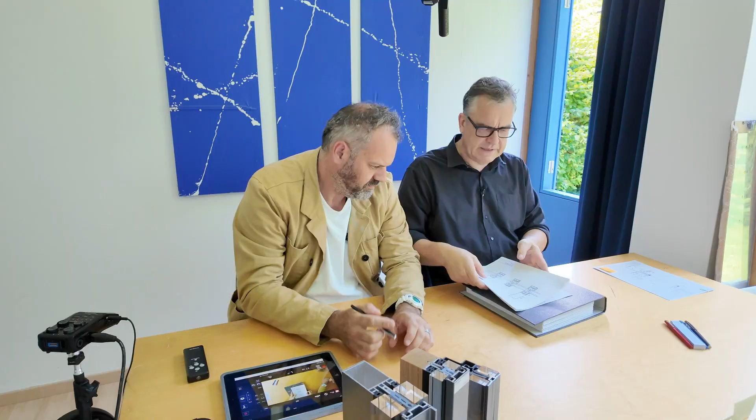So we did the tender process. We made the tender document. We did all this discussion. We had the bidding process. We evaluated qualities, time, performance of the system, budget, and now we have a contract. So there's a new partner in the game who's now really going to build what we wanted.

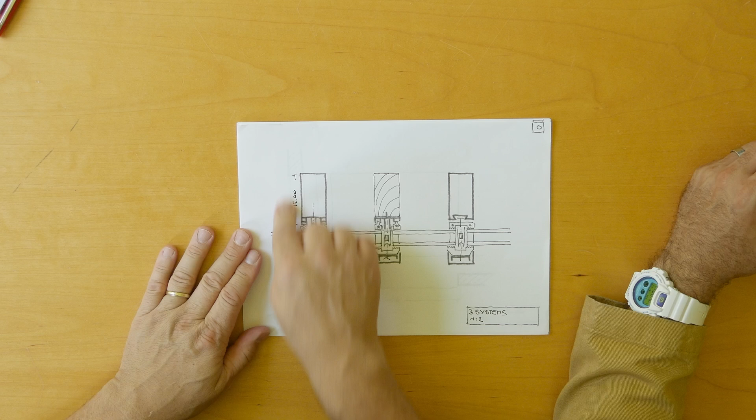So we have tender documents aside, we have all these nice drawings. As we discussed with the tender document, we decreased the amount of information here. So we do actually know a lot more, but now the contractor came with a certain system and he knows more about this system than we know, at least he should. And then he's going to redo this because he's not having this as a document for really manufacturing his facade.

He needs a new setup, which is called shop drawings. And these are shop drawings. It's actually shop drawings you did.

When I look at them, just to explain - because I not only teach, but we also at the office do facade engineering, and we also did the shop drawings for the contractors, the facade contractors.

So actually, first we worked as facade consultants, where we try to leave as many things open as possible, and we make vague or less informative drawings in there - general system work. That's when we work for the architect, and now I switch paths. Different project, different companies.

So therefore, now I'm working the shop drawings for a facade contractor. So therefore, I am actually drawing in high detail the facade, how it's actually going to be built and fabricated.

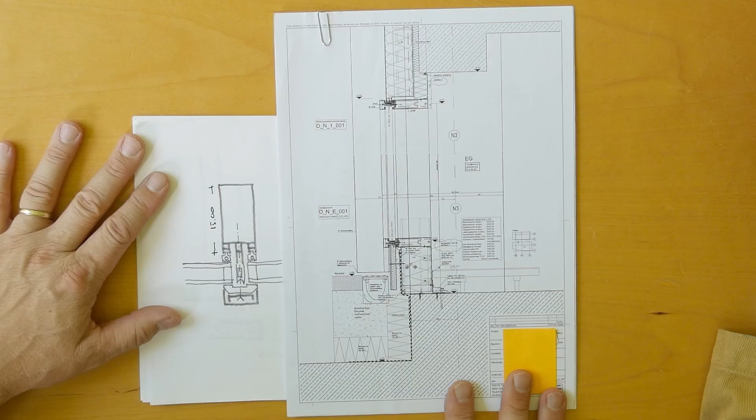So when we look at this, we're going to do a close-up in a minute. This is a lot more information. When I exactly look at this, it says the exact precise dimensions of the IGUs. We have the IGU in here, so we know exactly from the building physics and everything like that. We already had everything inside there, and we make sure that the glass - all information is known.

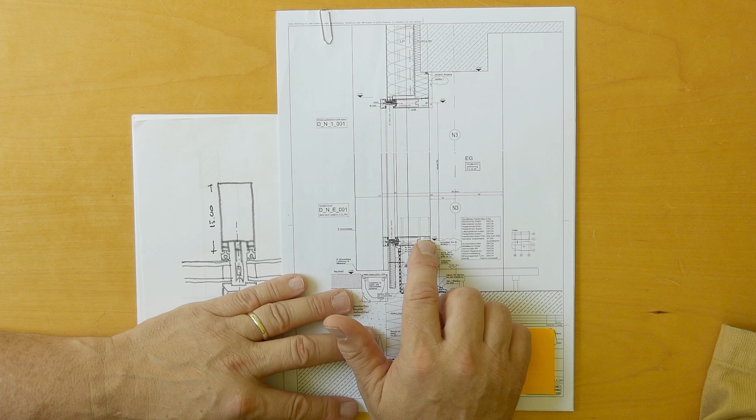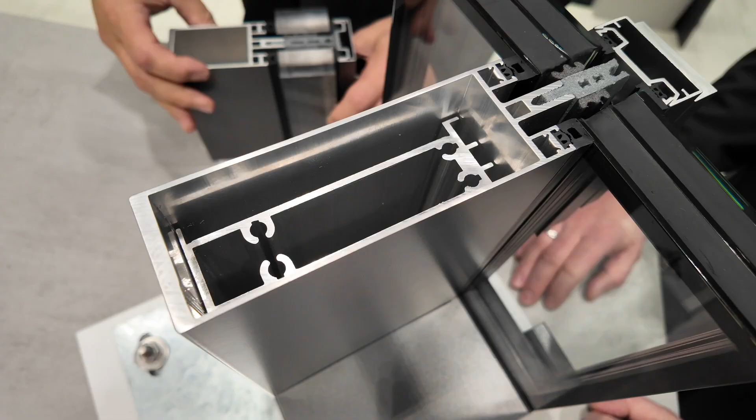This, the stick system, which is a certain stick system, is now defined in here with all the data of the catalog of the stick system integrated. Here you can already see the little insert aluminium profile to construction-wise stiffen the system - that's the one we've seen at the headquarters with Schüco. The little insert material is actually used here because it's a long span.

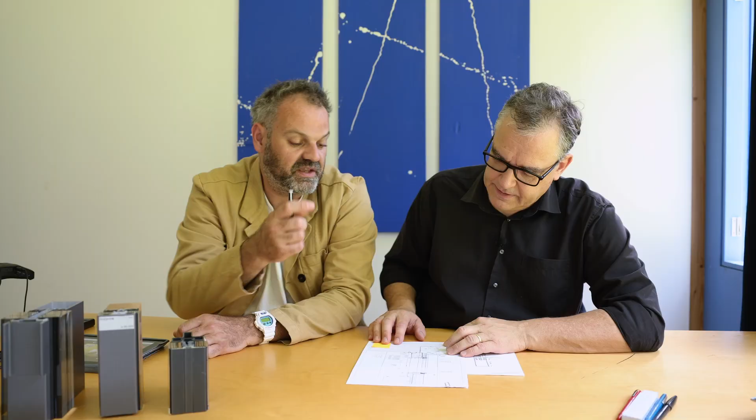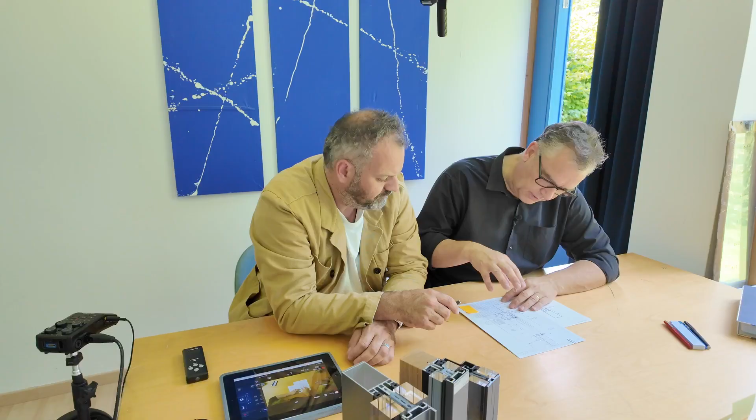Here, dotted lines, for instance, you can see already the fixation with the shoe that is used to secure it with the plate to the concrete that is dotted in here. So there's even the installation and the mounting hardware is seen. And I see you even define typology of anchors, of screws, of fixings with its performance in this detail. So all the information which you need for manufacturing the system is given here.

In what kind of software is this done? We've done that in Athena. This is a plug-in for AutoCAD. It's a software package on its own which allows a facade engineer to make these highly detailed facade drawings with ease and speed. In this case, I made, I think for that project, 75 of these shop drawings just in this scale, and then we had overview plans and whatsoever.

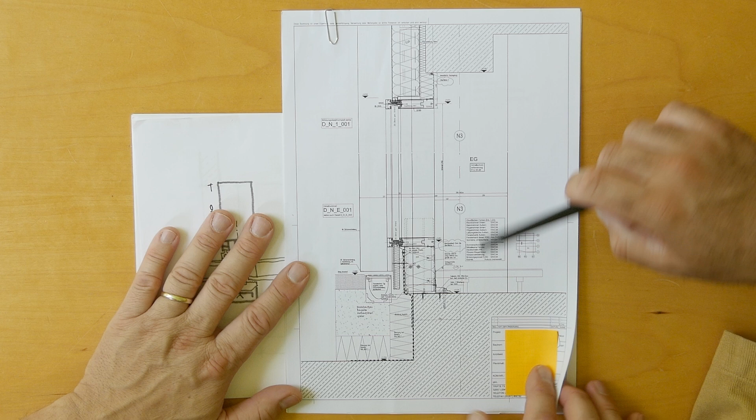Here you can see, for instance, these softwares make it easy to have the insulation fitting perfectly. We can have the metal that is set here, these cassettes. You type in the thickness of the material, 3mm aluminium, and then you just draw a polyline, and then it already makes the right curvatures, which later is also connected to the production machinery, the metal bending, the metal cutting. With all the different geometries, the unfolding of these profiles is already included, because these drawings will be then later exported also for the company to make their life easier in the machine hall.

So there's first purpose is to get all the information in. Second purpose is to, say, pre-organize production.

So these data goes then directly to the different types of production. It's sometimes even so that I have to know exactly what the machinery of the contractor is, because he may have certain machines that work with one or the other technology, where I know that the bending radius or whatsoever are different.

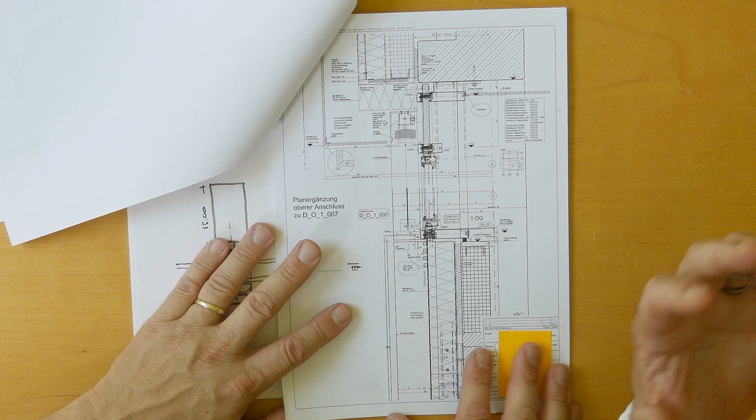What's also interesting is that all the products are already described here, because then we know exactly that this is the sunshade - this is the product we have chosen that is within the offer - and we know exactly where the engine is, and then I can also plan the wiring. So therefore, here we see the wiring, and there's also care here for watertightness.

This is really my most fun part. This is what you like most. Yes, this is what I like the most.

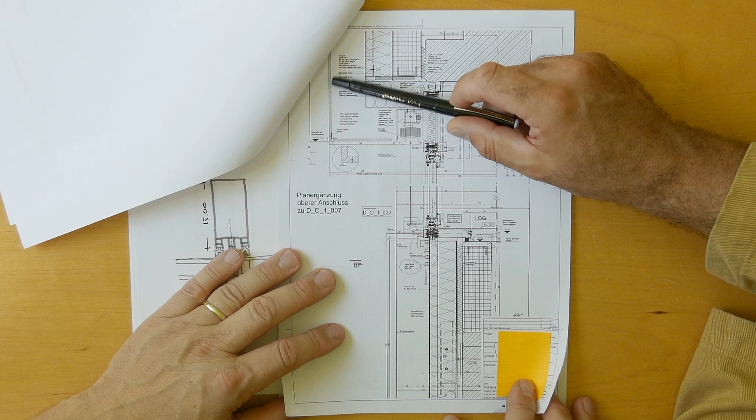But whenever you change something, you have to change a lot, because every plug and every sealant and every film and every water barrier and whatsoever is described. I even described here, this is for instance an HPL facade cladding. We even defined here how the miter cuts are done on the angle in order to perform a very sharp corner detail. Appearance, yeah. Everything is in here.

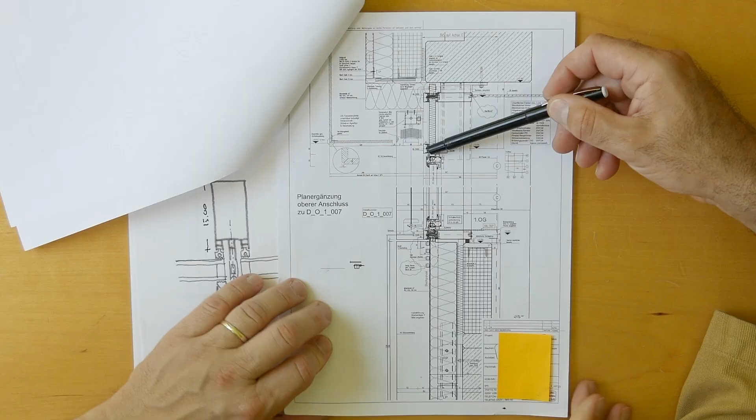All the information, and obviously you also have a section and the main plan, elevation, horizontal section defined. And sometimes there's also one that is just half a meter in front of it or left of it, because of the geometry of the construction site. This is a prefab concrete element, and there was already cast concrete which has a slightly different geometry, so you also have to take this into account, because the guys at the very end have to know the differences of the assembling on site.

This is a lot of information. This is brought into a detail. Changing it will be a nightmare, because then the changes directly end in other details as well. The nice part with the shop drawings is the main geometry is given, the system is given, all the products are known. So information is fixed. It's just organizing that the geometry you need is really possible to be produced.

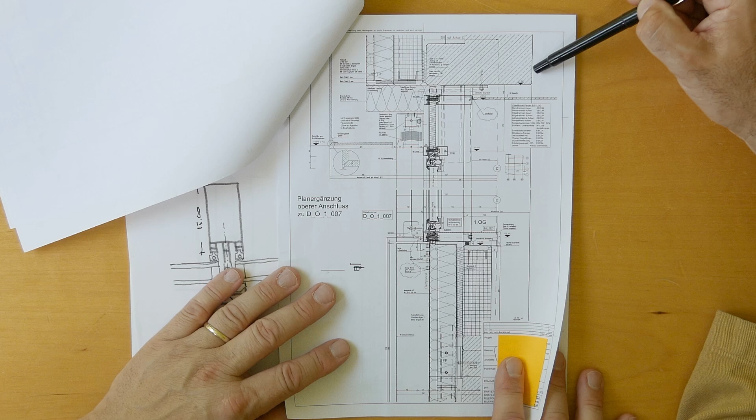That's mainly it. But I also have to mention that back then when we drew, it was not as intelligent as it is right now with BIM, Building Information Modeling. Nowadays these software tools also have a reference to the structure. The moment the structural engineer changes something on the concrete wall, it already changes in here, and you can get a warning. You can also make more adaptable components so the facade is always attached to that corner, and when the corner moves, the facade also moves.

So it's a little bit trickier to set up, but there's a lot of automation integrated if you are able to manage that. And at the very end, who manages the main data files? Who manages what? Which brings me to another super important aspect, the process of the shop drawings.

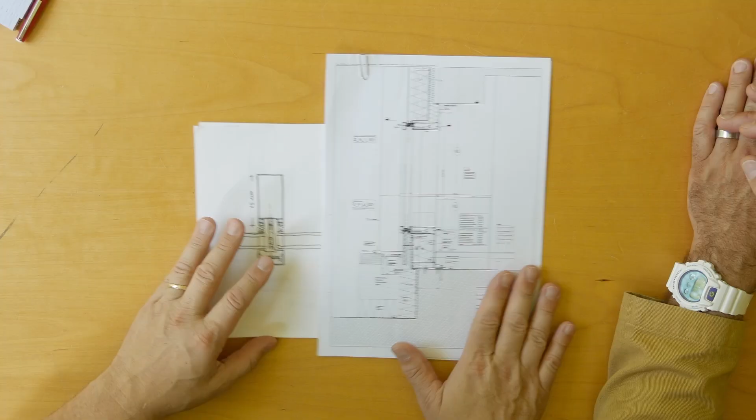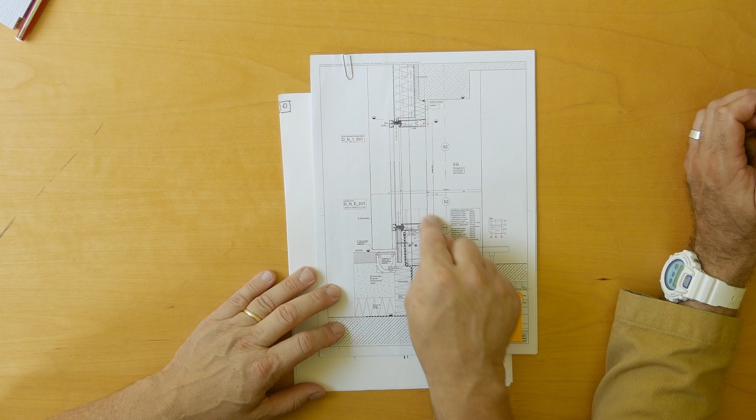So, as engineers we did this. We have a company who's now going to build it. They do the shop drawings. Then I, as the engineer, receive these shop drawings, and I have to check and evaluate them. I have to make sure this fits qua performance to what we wanted, qua system performance, and qua geometry. Size, color, whatever. And then I actually need to sign that I agree on this shop drawing.

Then the shop drawing goes back to the company who does the manufacturing. They need to change things if there's things to be changed. This is normally a kind of conversation where you need a process. And after it is controlled and approved, it goes into production. Then the production process happens. Important here is, this is to be done before production starts.

So tender process, contract given, the shop drawing process needs to start directly, because that needs some weeks, maybe months, depending on size and geometry and availability of people, and then production can start. So between tender process and production there's still a gap where these shop drawings are to be done. And then you need to organize, as the team which is going to build, that this process works well for the construction company, so they can produce the things they need first, and other parts later.

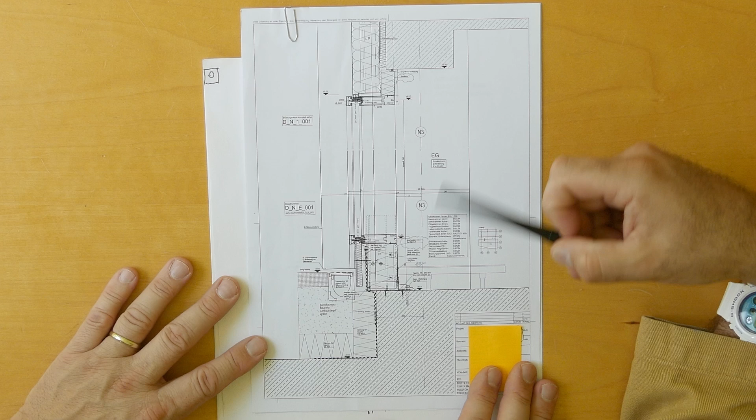This is why we sometimes see at construction sites that huge areas are already filled with facades, while a corner detail, for example, is not solved. We know we can solve that, but it's later, because we mainly have to do the largest parts first. Also, if you look at the density of information, you can already see that these drawings, even with specialized software, take more time.

In this case we worked for the facade contractor, but on other projects we work on the architect's side, for instance helping him develop the details. So sometimes I know what the others are struggling with. And we even had moments on the facade contractor's side where the architect called us: hey, we need to change that. Have you been on the building site? It's already built. But we need a door in there. It's not a facade only, but okay.

Then you have to call and see what is possible. That is the moment where it really becomes expensive. That's the moment when the process gets a hiccup. And when the process gets a hiccup, in the end it's going to cost time. That means money. Yeah, precisely. So, shop drawings.